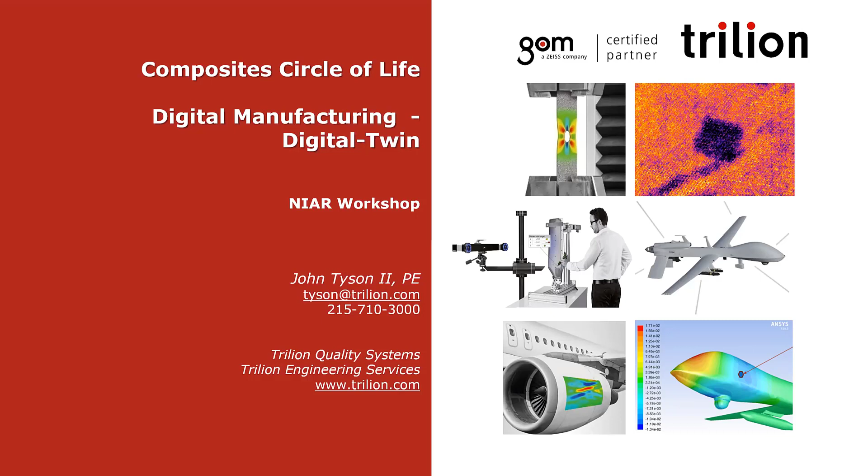So we're going to be talking about in situ NDE quality. This is where we're able to measure during the manufacturing process the in situ quality of components in real time, so you can be making good parts every time.

Our digital manufacturing allows us to do toolless manufacturing as well as guided assembly and bonding to drilling operations, click bond assemblies, all the different things, as well as alignment of components and checking all of this throughout the manufacturing process, as well as documenting it in the digital twin.

And then being able to do structural testing and structural health monitoring on components so that we can truly understand the response of these materials throughout their life. You saw in Waruna's presentation a broad variety of applications on real structures and how it could be really powerful in monitoring components throughout their lifetime.

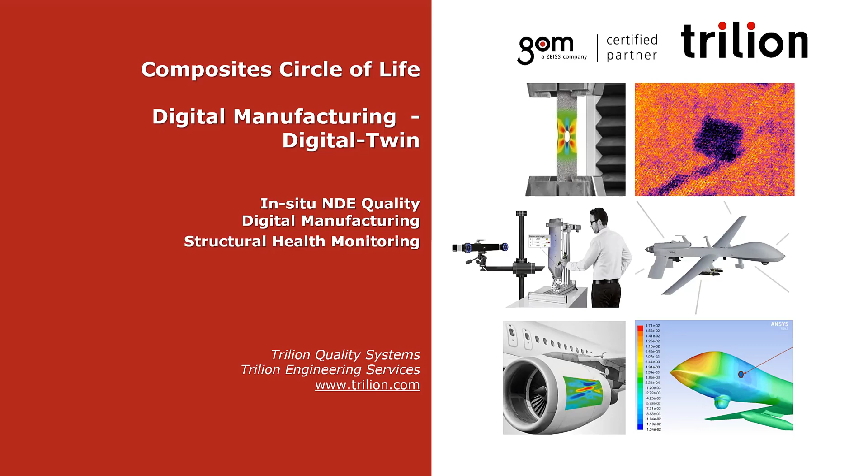So in the composite build, in situ monitoring, we can be building components even in a toolless way. The idea of being able to measure the 3D shape, deformations, the robot head location with incredible precision, as well as being able to look at the quality of the build - voids, disbonds, things like that, as well as FOD and other kinds of foreign material.

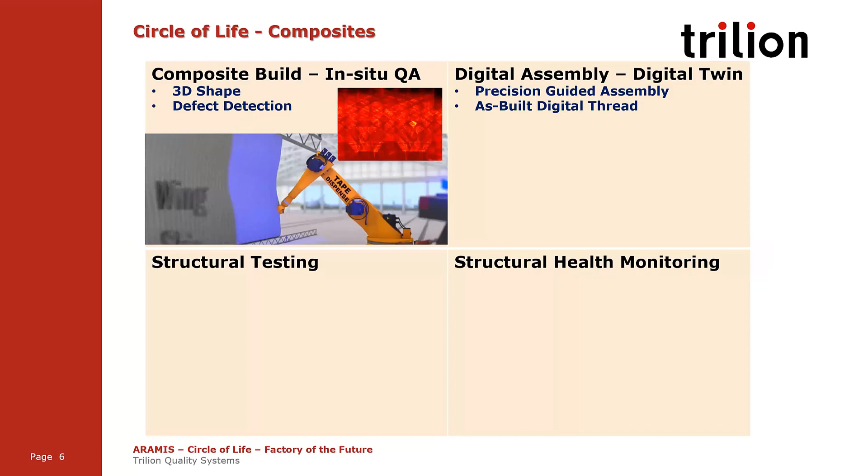The digital twin, we can be doing a digital assembly of components, and we'll give a demonstration of that with Joe Horn, our lead engineering manager, to see how this kind of assembly can be done.

Then in structural testing, the idea of being able to make measurements on an entire vehicle and really understanding the structural response of components in a detailed way, as Waruna was showing, holistically on entire assemblies and being able to see how all the parts work together.

And then in structural health monitoring, being able to monitor an entire vehicle and compare that against its finite element model, and be able to really do predictive maintenance, as well as validate the defect and its severity on the component.

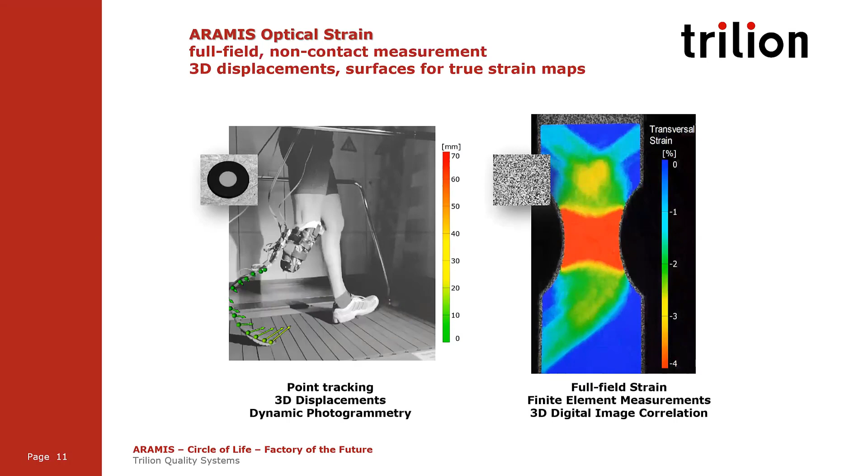So as we saw before in the beginning, there's Aramis, our stereophotogrammetry capability. The idea of being able to track target dots very simply, with a test setup time a fraction of wired sensors, or putting a pattern down and getting the full field response - the computer literally creating target dots continuously through that pattern.

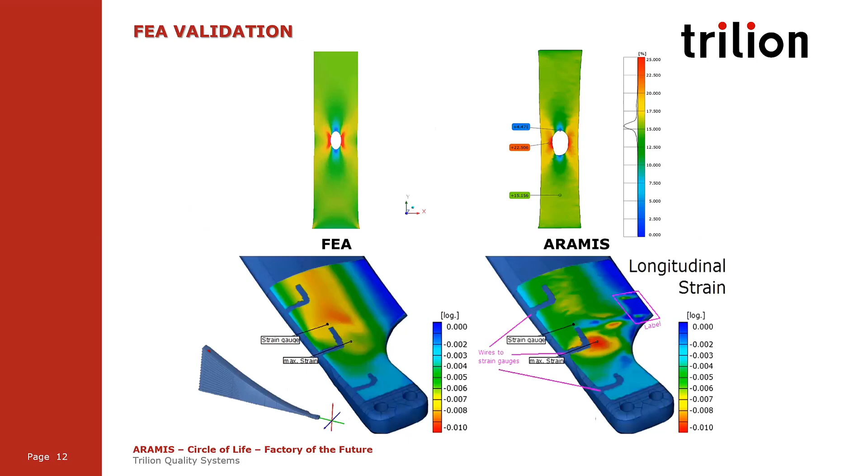And to be able to validate those results in a really clean way against comparative models and iterate those models in a good way, as Waruna was showing some of that work - including in this case the buckling of a fuselage panel, very similar to what Waruna was showing, but even large structural response of helicopters, as well as tooling and that kind of thing.

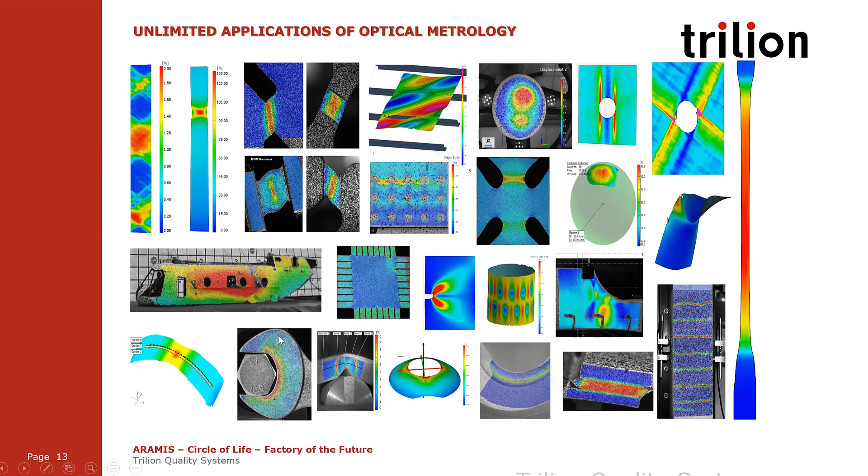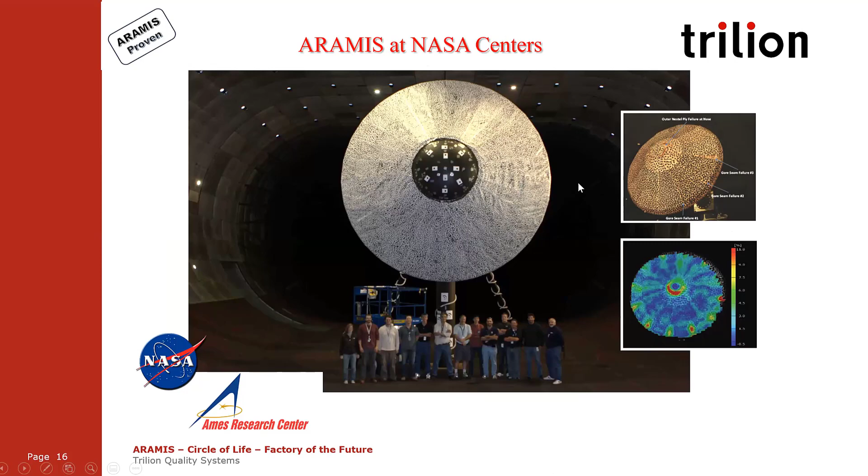So we talked about some of the applications within our NASA centers. Here's the IAD in the largest wind tunnel in the world at NASA Ames, and we had data all the way around this 25-foot diameter component during the wind tunnel measurements.

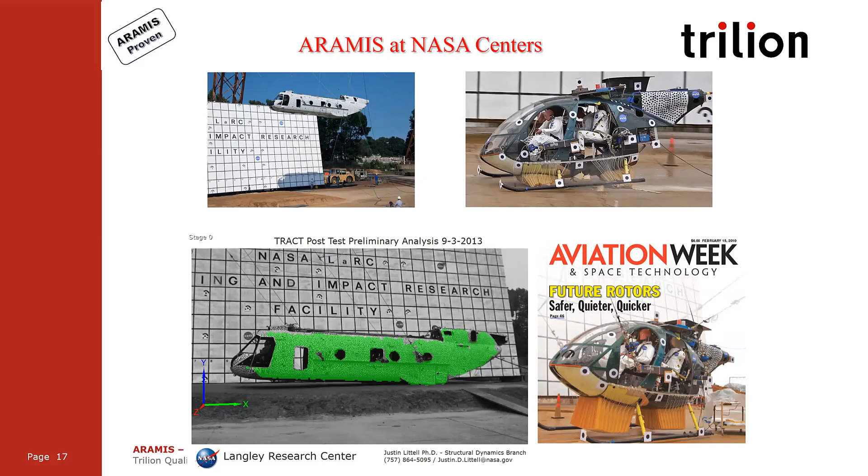At NASA Langley, they do drop tower tests regularly, and have for about 15 years with our equipment. Here's an example of an entire helicopter getting dropped and understanding the structural response of the entire vehicle.

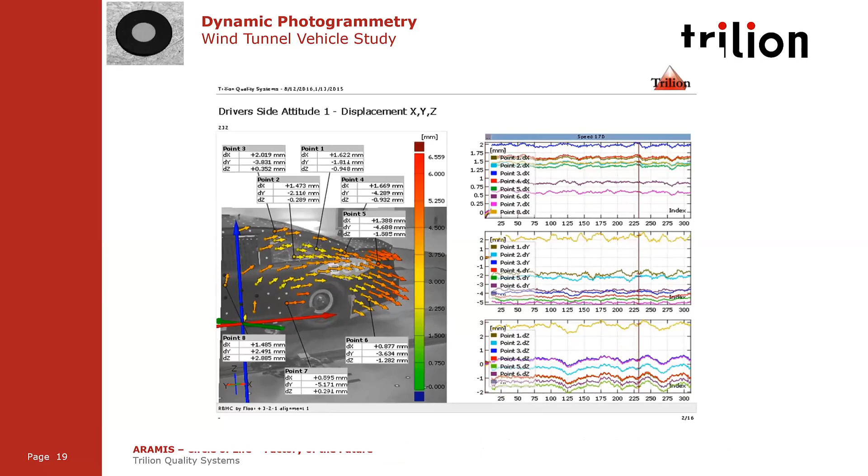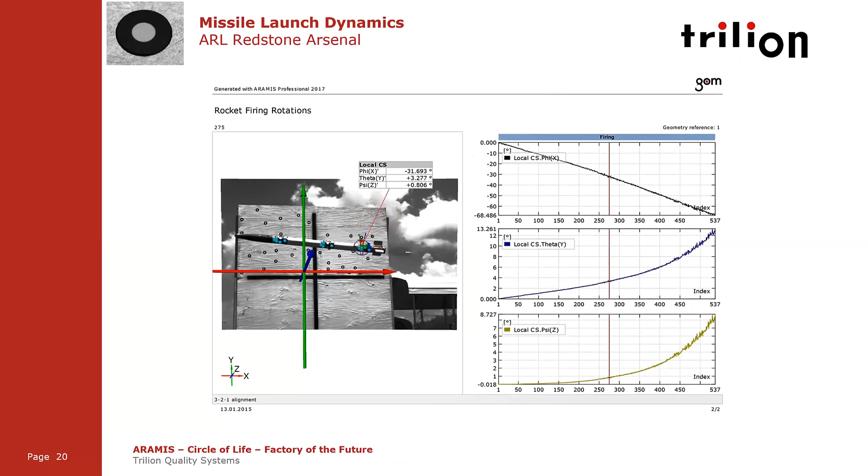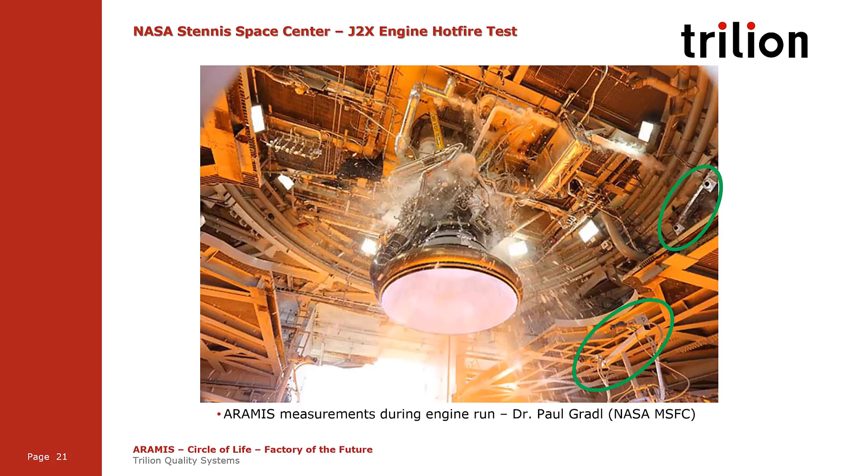That was down at NASA Marshall. And Dr. Paul Gradl testing rocket motors at Stennis Space - you can see his Aramis systems studying something that is very cold and very hot simultaneously. So that was pretty cool. And that laid out tests as we talked about before.

Let me get into digital manufacturing and the idea of being able to utilize stereo imaging systems in the manufacturing, not only quickly allowing the manufacturing steps to occur, but doing real-time quality control simultaneously.

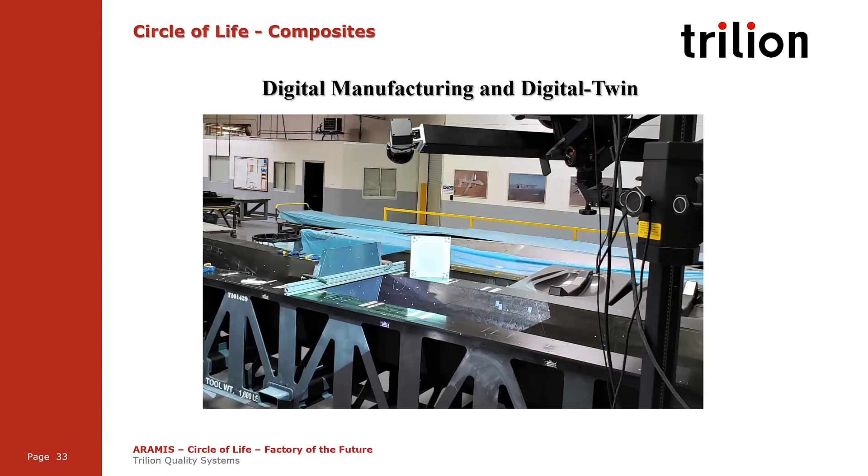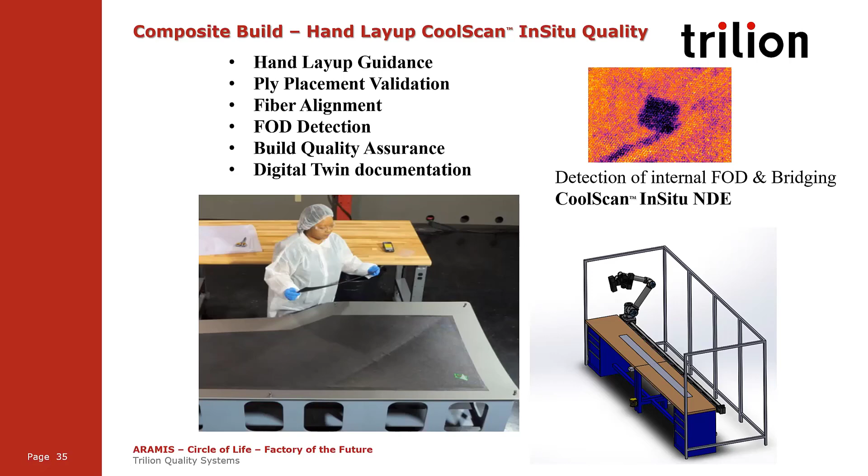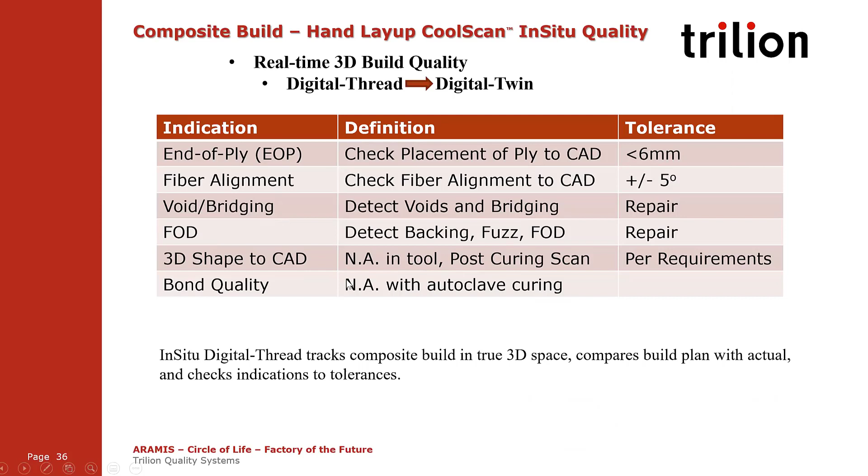And so for hand layup, we're checking for end of ply, fiber alignment, void and bridging, FOD, 3D shape to CAD, which in a tool maybe is not so important, but post-curing scans we do all the time, and bond quality, and in thermoplastics will become very powerful.

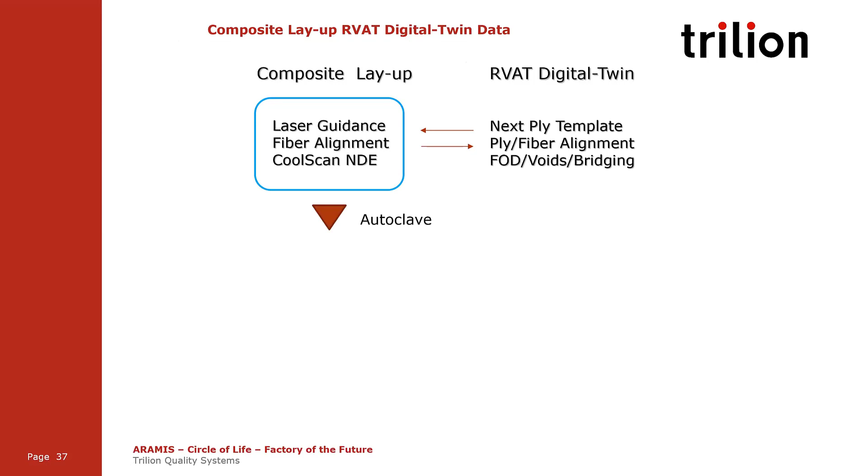So in the composite hand layup, we're going to give laser guidance, fiber alignment, and do the CoolScan NDE measurements. They're going to autoclave the component, and with the 3D scan, and then RVAT assembly, we can clean and energize robotically, do the adhesive beads, and do the QA checks. So all of this is captured in the digital twin during this process.

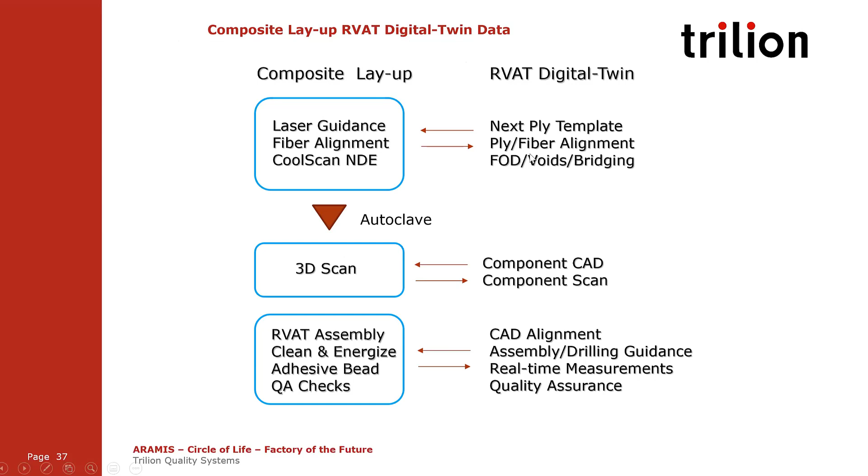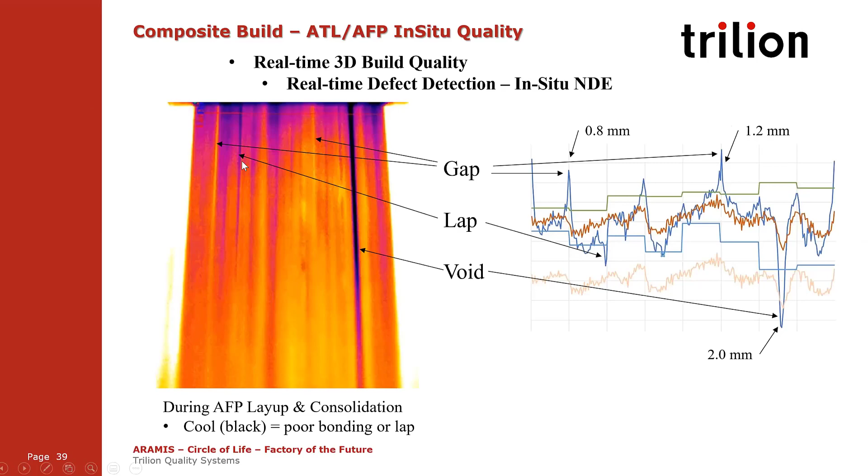And in AFP builds, we can see the real-time robotic layup, and a typical situation, here's just a single piece of tape, but you can see a void underneath. In this case, this was just a void from a previous layer buildup. But you can see gaps showing up as well as laps, all of it automatically analyzed and resulted in a complete analysis.

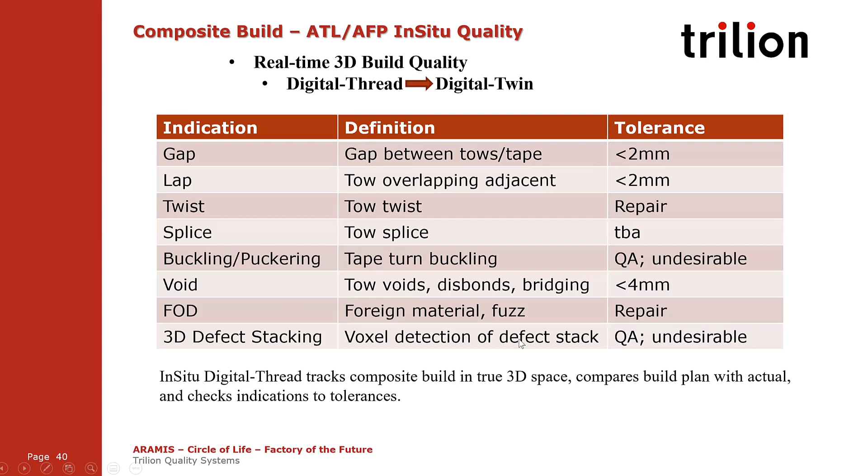And here we're looking at, again, detection of laps, gaps, twists, splice, buckling, voids, FOD, and even 3D stacking of the defects in a structure, where a defect may be acceptable by itself, but stacked up, it would be a larger defect in 3D space.

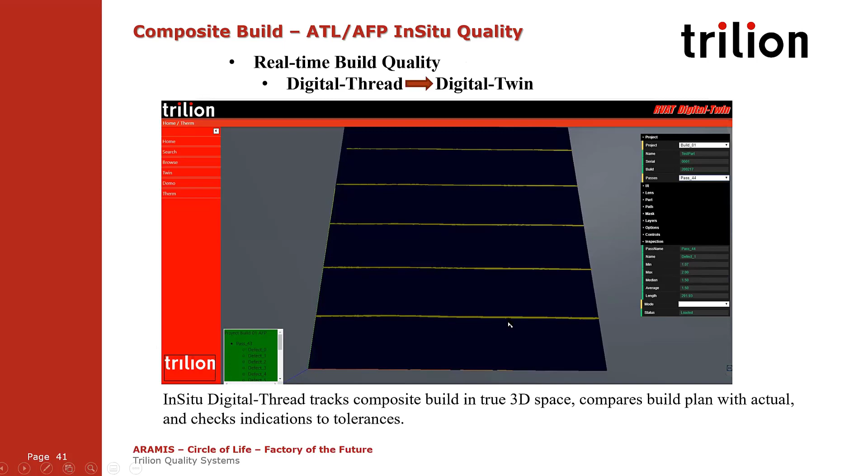And here's an example of looking at one layer in our digital twin, and we can see the results of a specific defect here and the min-max values of it, as well as looking through the entire specimen and seeing, in this case, build voids. These are all acceptable, so they're yellow, but if they were stacking on top of another, they would be called out as concerns.

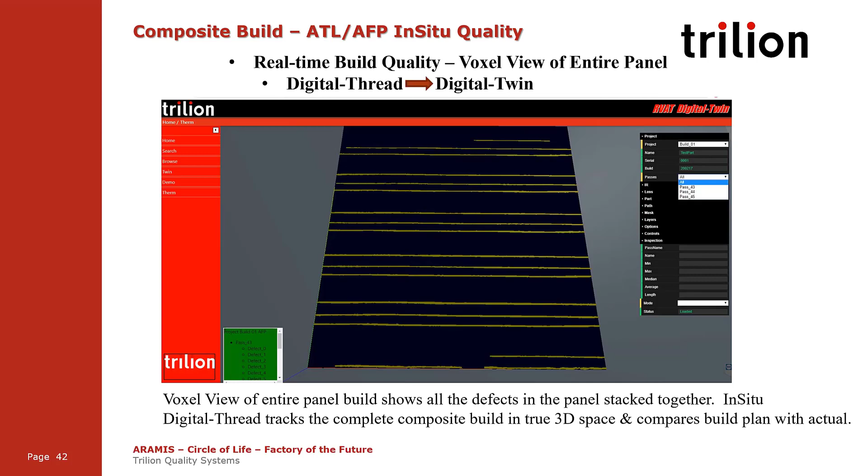So in the robotic build, we can track the robot head with incredible precision, especially when you get into larger structures and the robot is now on a gantry. Knowing the precise location of the robot head relative to the tool is difficult. We're tracking that in 6 degrees of freedom with very high accuracy.

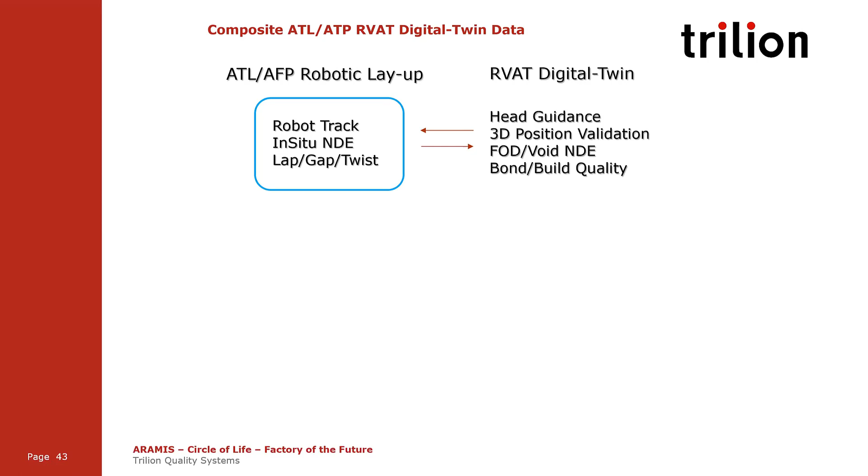Then we're doing the in situ NDE at the same time, looking for lap, gap, twist, feeding all this back into the digital twin in 3D space. So we are tracking all of this in complex 3D space. When we cure the specimen, we can then scan it, and again, RVAT assembly, clean, energize, and capturing all of this quality data in our digital twin.

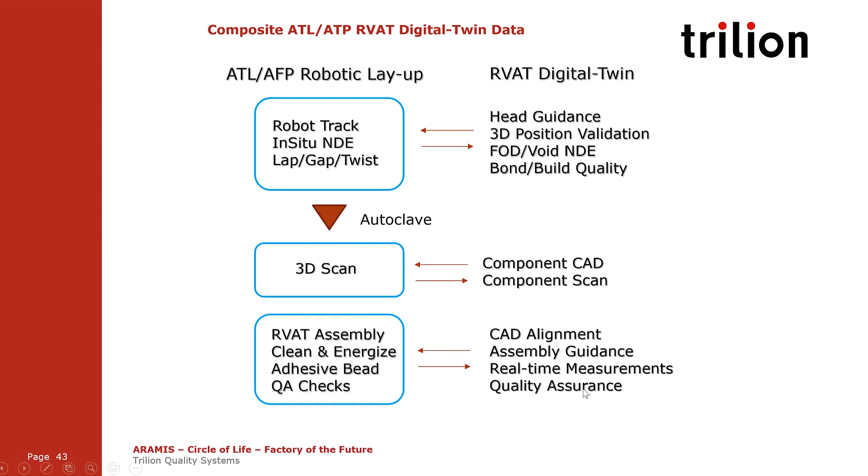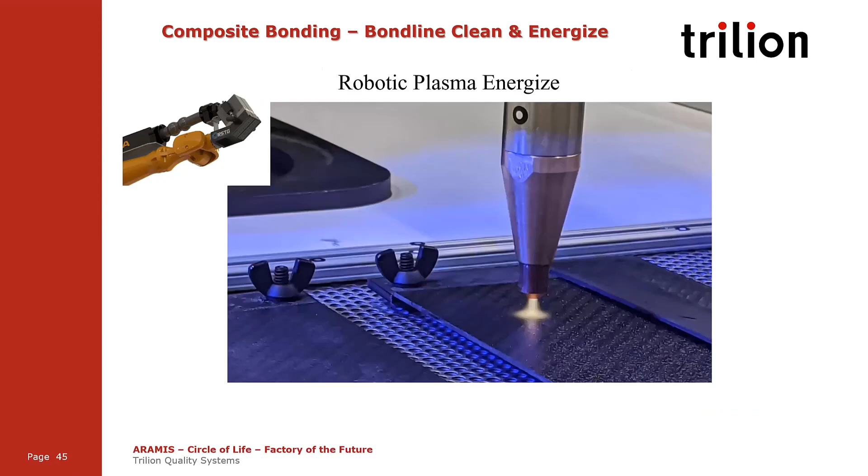When we get into the robotic cleaning, we're using a robotic carbonic 3D cleaning method, which can go and clean the surface. We can then do a plasma energize, all robotically. And when this happens, we see the shear strength of the material increasing tremendously from a properly cleaned and prepared specimen. We're also working on coupling that with laser etching as needed.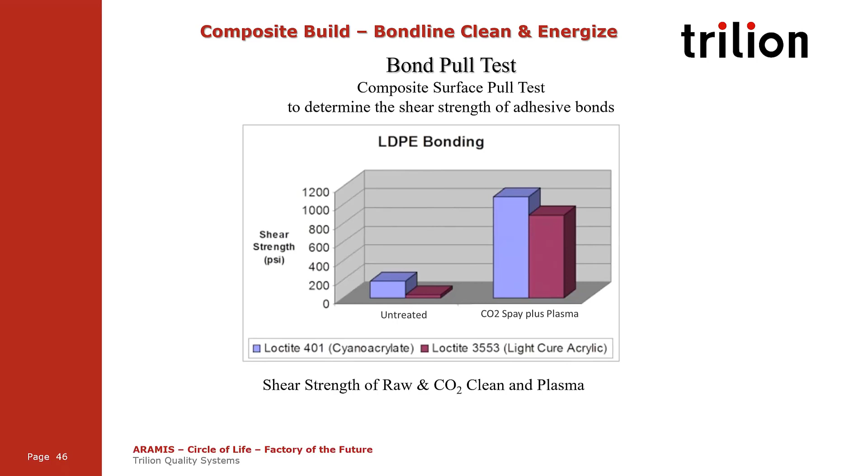And then we can put out a very precise amount of adhesive bond, and we can do what we call smart bonding. In the smart bonding, we can choose the amount of adhesive depending on what is needed to potentially fill gaps between two components or be able to measure out exactly the amount of interface area that's going to be, so we get minimized squeeze out, even internal to the structure. And then with our scans, we can measure the bond line thickness of every component.

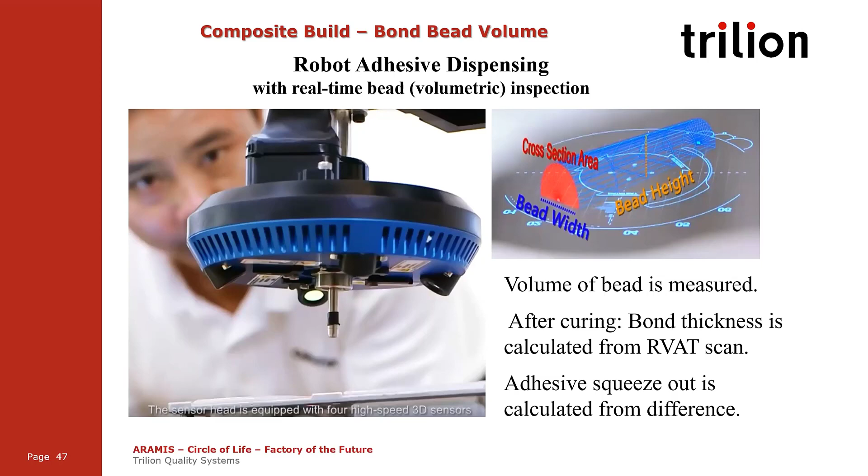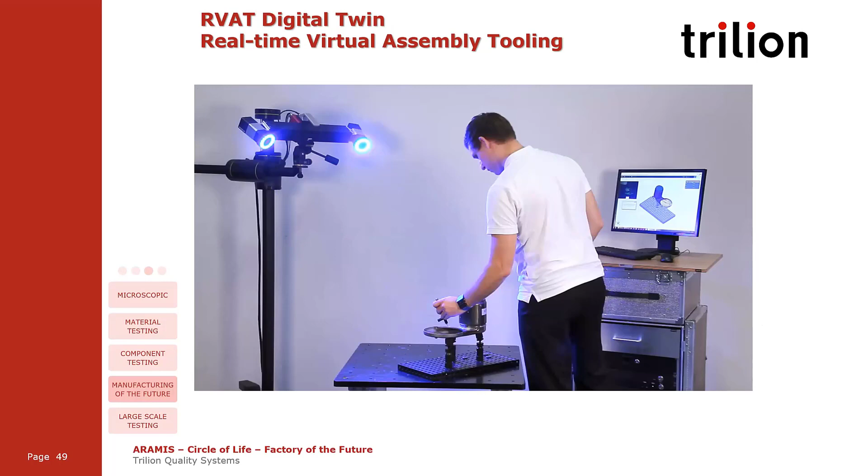Then when we get into digital assembly, we're again just scanning the component. And we're going to have a little demonstration of this in a bit. But we're using the Aramis sensor, so we're accurate down to better than 1/1000 of an inch. We're giving real guidance directly to CAD. So you're building to CAD rather than to a generic tool. And we've scanned the real part, so we're placing the real part rather than placing an ideal part.

This is MRL9, so used throughout industry. We provide complete operator guidance. So you're getting precision guidance during the measurement, making it faster and easy to use. But in applications, one of our big implementers early on was General Atomics. And they found that using RVAT, we were 60% faster than even using hard tooling.

And quality control comes in automatically. You're using the same tool after curing to check the quality, and all of this is captured into the digital twin. So you're really doing this faster and more effectively than traditional methods.

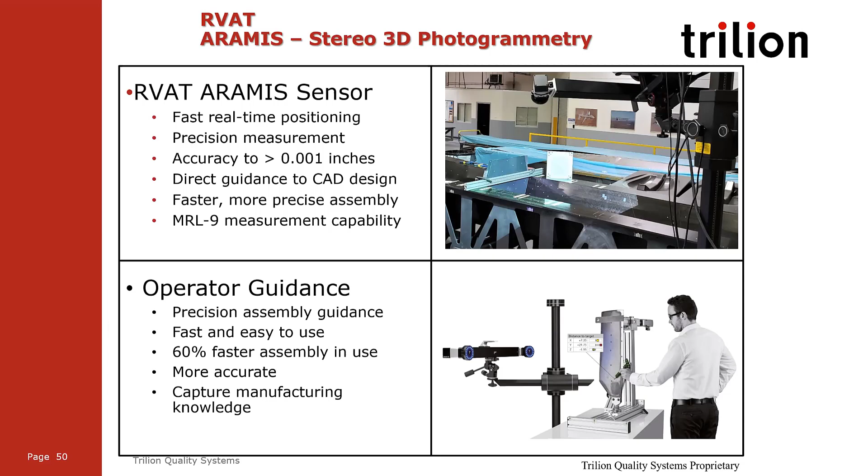So we're using a dynamic reference, and even if the component is flexing, we're still tracking it to its CAD. The CAD can even be moving in three-dimensional space as we're positioning it. So it works on any complex 3D structure, and we're measuring in true 6 degrees of freedom.

We're watching how everything moves in a really precise way and capturing each of those build steps in the digital twin, with the critical measurement points that are defined for each component. We're capturing the as-built along with the scan and the CAD. So all of this is in the digital twin capture.

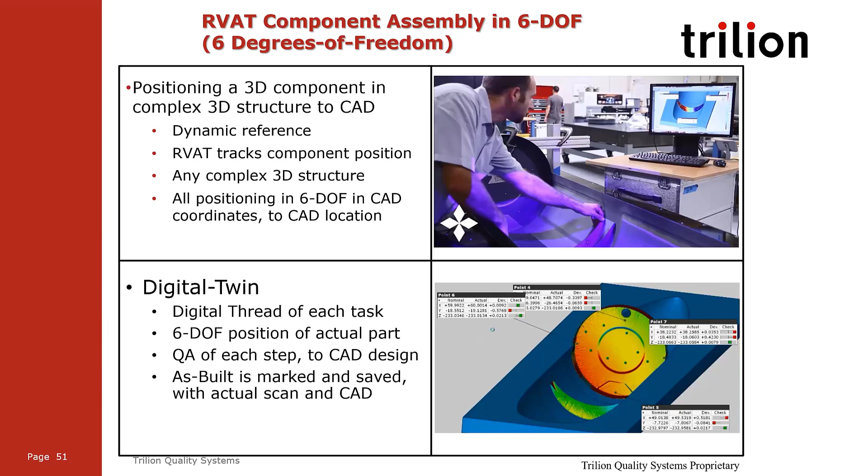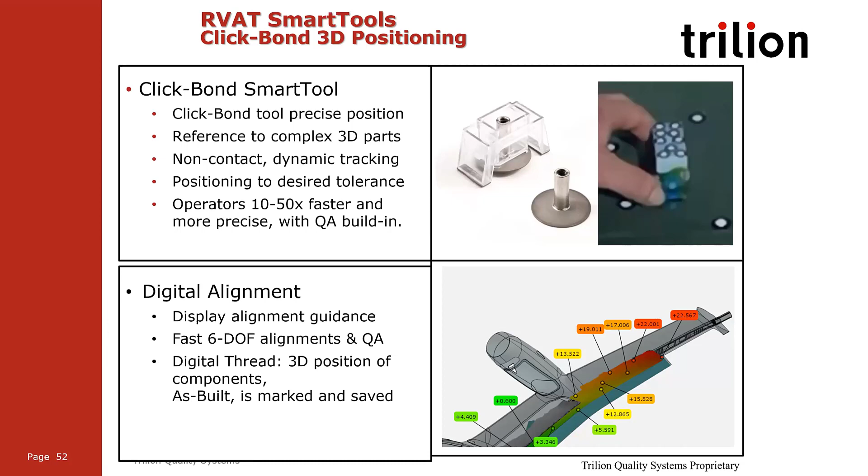Then we can do smart tools, and smart tools allow us to do a variety of different steps. As an example, smart tool for drilling, for click-bond alignment, or even custom tools for doing alignments of components. You can turn any tool into a smart tool and track it, document it, and record it in the digital twin. When you get into drilling operations, this becomes really powerful.

Here we can use our smart drill guide. This allows us to do 3D tracking with very high accuracy. And compared to traditional methods, it's 10 times faster.

Literally you can track this into position and drill your starting holes, as well as change the guides out for different drill sizes. So you can do your pilot hole, your larger hole, and the reaming hole. It's hugely faster, and you're documenting exactly for quality QA, as well as that digital thread, capturing it all in the digital twin for full analysis.

You can also do blind drilling. In this specific case, which we'll be demonstrating today, you're taking a composite panel where the system knows there's a hole in the structure down below, and you can do a blind hole drill right into that structure because the system knows where all the components are.

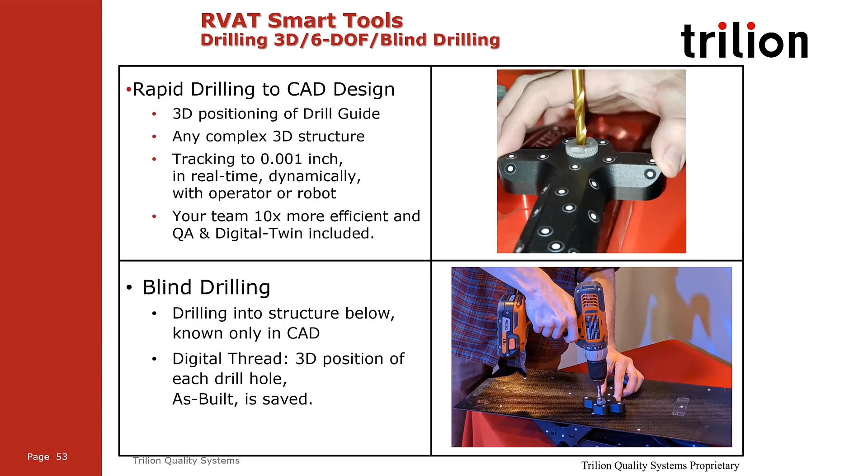This makes your team, using traditional methods, way faster and more effective than you currently are. You can even do checks to see what the gaps are for a smart adhesive bond, or feed back to engineering and say, hey, we've got a little problem here. The field people will have really powerful information to feed back to assemblies.

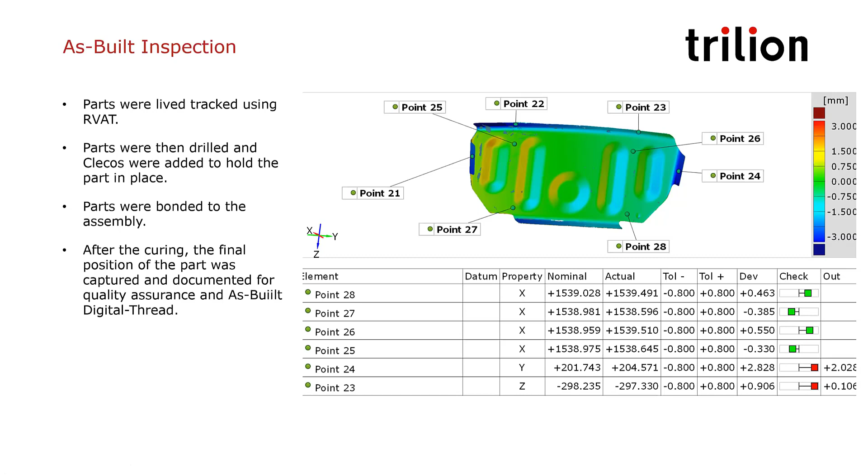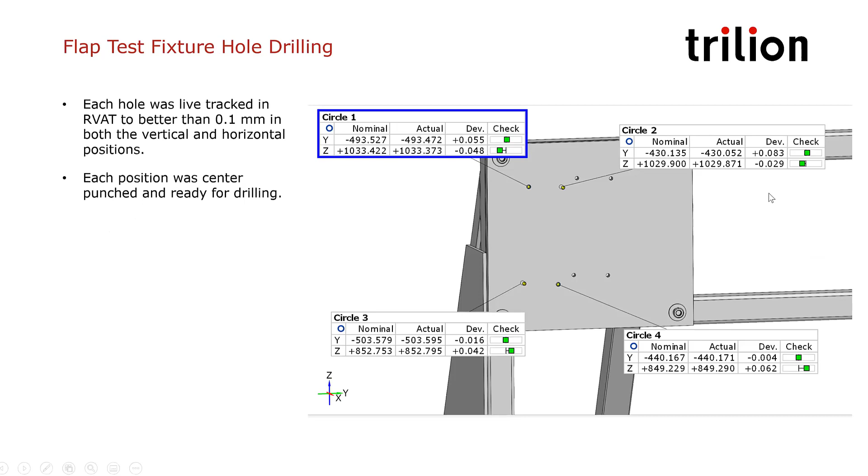And looking at all the critical checkpoints, see if they're all in alignment or not, and be able to check - this is the kind of quality checks you get, as well as feeding it into QA management, automatically getting reports, and being able to buy off on specific issues automatically and rapidly, effectively in real time. There's also an alignment tool to do a drilling guide for specific applications, and how these were put into position and checked to make sure they're all in alignment as per the requirement with the QA checks.

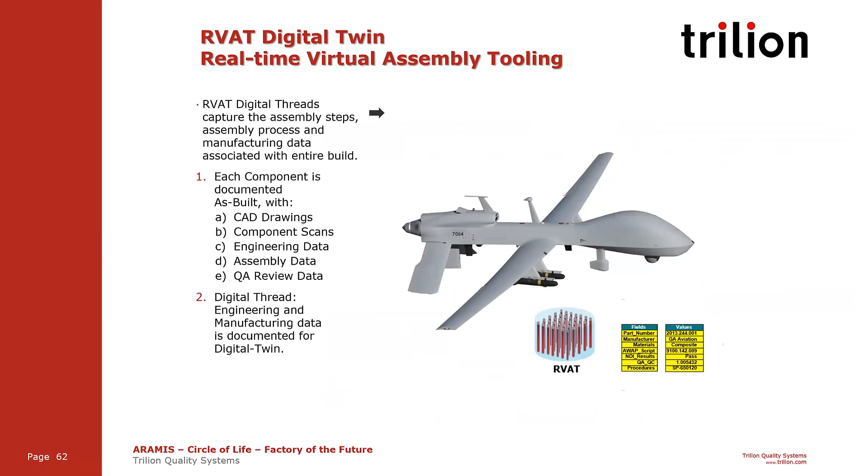We're applying this digital twin concept to understand the CAD drawings, component scans, engineering data, assembly data, and the QA review data, all put together, capturing all these digital threads into our digital twin document. So then you can graphically look at an entire vehicle and dive into, say, the wing.

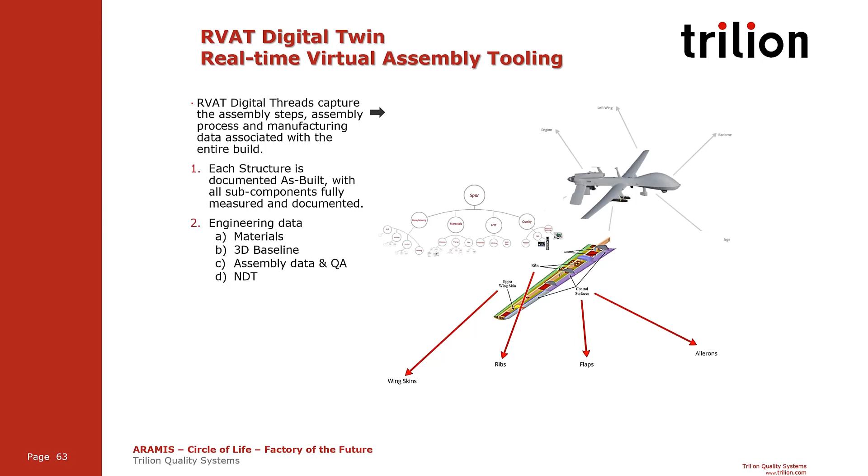You can see how the components were built, and the entire tree of information associated with every component in that assembly, from the materials, 3D baseline, assembly data, and then NDT, capturing all of this information in the digital twin.

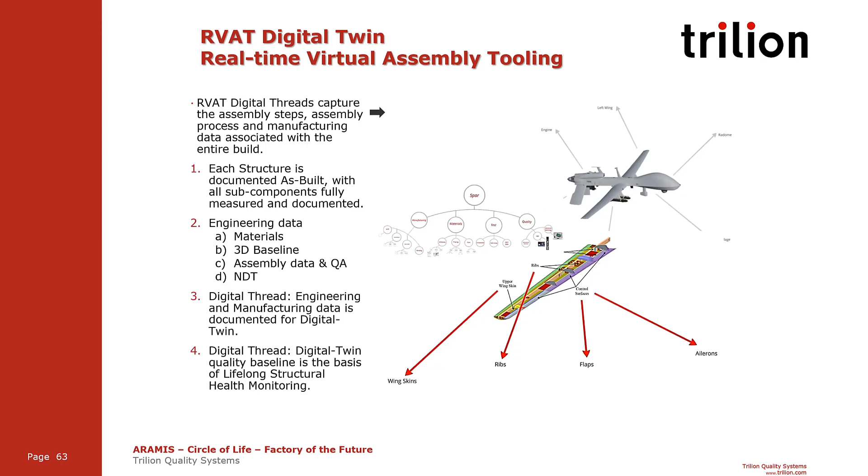But this information, especially the strain measurements, displacement measurements, and alignments, can also be used for long-term structural health monitoring. You have this all in the database, so now you can be monitoring structures through structural test, as well as through final assembly and into the vehicle.

Our digital twin server utilizes the RVAT data coming in, in-situ measurements coming in, structural health monitoring coming in, as well as the QR codes, which automatically and optically define the component serial number, and links all that data together. Then we can bring in the engineering data and your production data all into the general server, and with the agents bringing all this together into one set of data, we're able to do the analytics on this, which then provides the true data to the RVAT digital twin.

The web server can then send out a nice solid GUI and reports, but the RVAT digital twin server can then generate reports to your customers, your service team, FAA as needed and as appropriate.

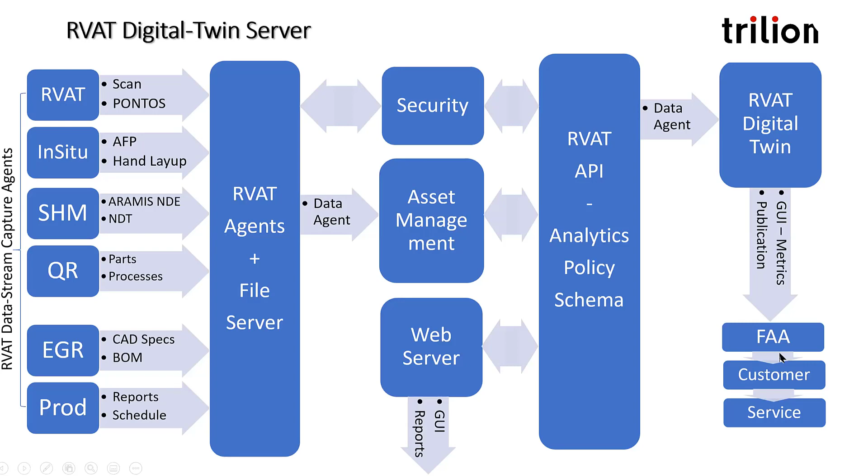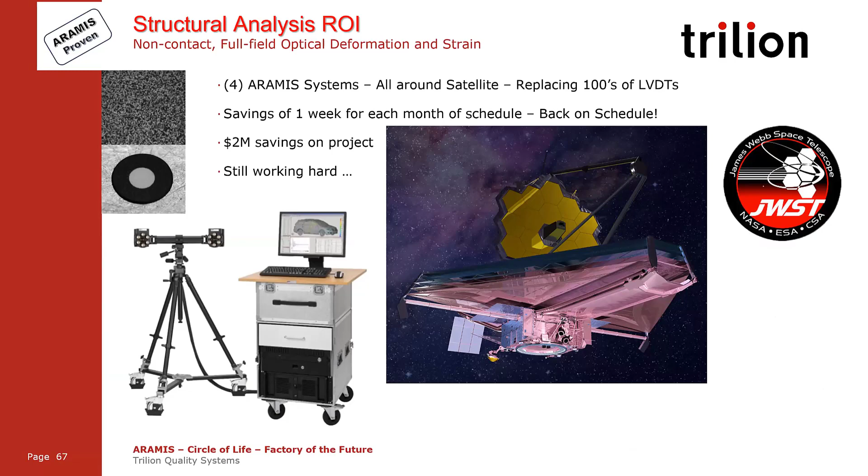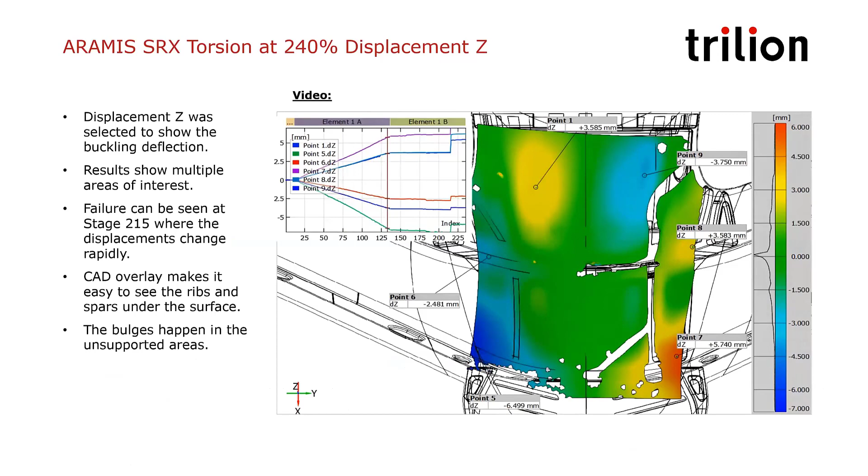So getting into structural testing, we talked about the structural testing on the James Webb Space Telescope. Literally a 3-month program, completely paid for the equipment 5 or 6 years ago, and it's still working day in and day out for free. Structural testing at Boeing, one of our very best customers, so that's all really good. Here's just some example strain measurement on a component, looking at displacements during structural test.

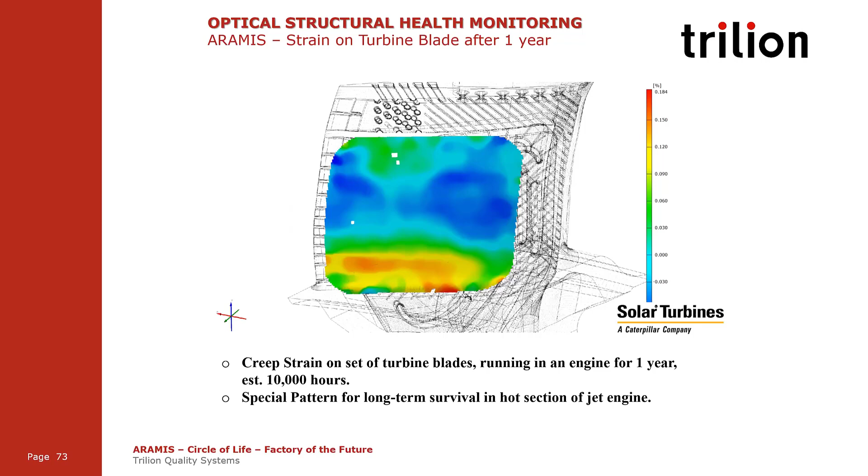Getting into structural health monitoring, one of the early things we did more than 10 years ago was we patterned a jet engine turbine blade set, and those blades went into a hot section of a jet engine. Normally we use paint to do patterning, but in this case we sputtered on a ceramic coating. The ceramic coating survived for a year in the hot section of a jet engine, and we were able to get this data, which shows the creep strain on the blade. This data had never been gotten before. It invalidated one of their models, validated another model, and is now a traditional method. Every new engine, they do the same test. This gives you an example of being able to monitor structures over a long time and understand creep events and other kinds of results.

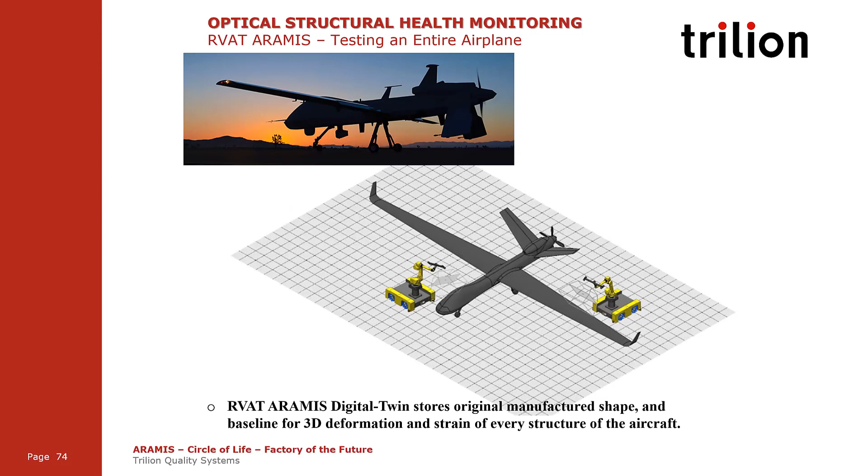One of the things we're working on right now is developing the method to be able to do this on entire vehicles or on large structural components like wings and box beams, that kind of thing. With our equipment, we found that we can detect even barely visible damage in composite structures and locate it with great precision anywhere on the aircraft with a rapid inspection.

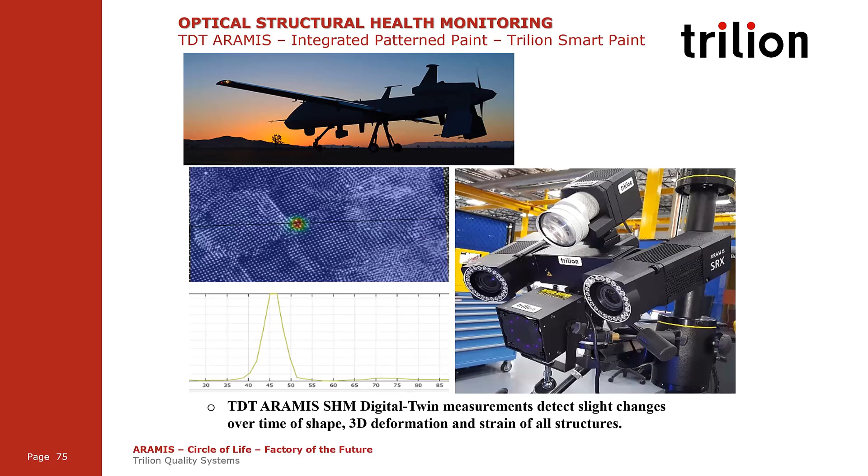We can then couple with our thermography to check the composite and make sure of the extent of any damage. With barely visible damage work we did at General Atomics, we found there was no damage at the lowest level of barely visible damage that they provided us. The Aramis still picked it up as a little dent, but there was no delamination by the thermography. Increasing the load, we created a larger defect, and then we started getting delamination. This gives you a sense of how that could work. So Aramis is the first line of measurement, and we couple it with the thermography to quickly check the extent of damage as needed.

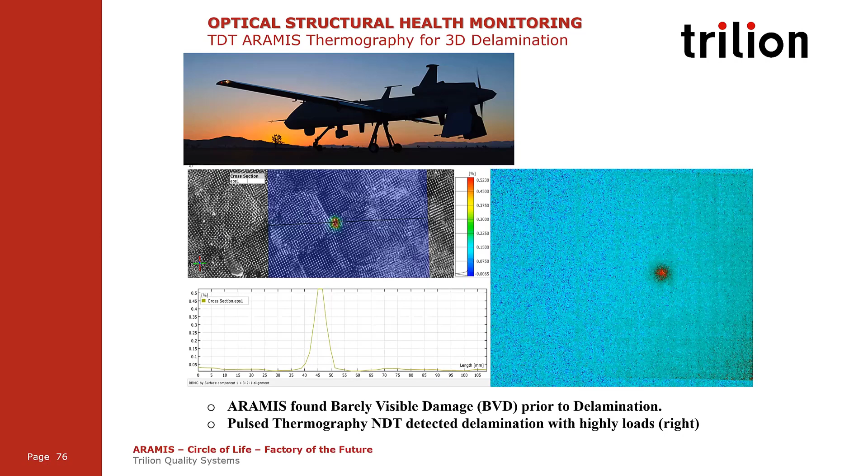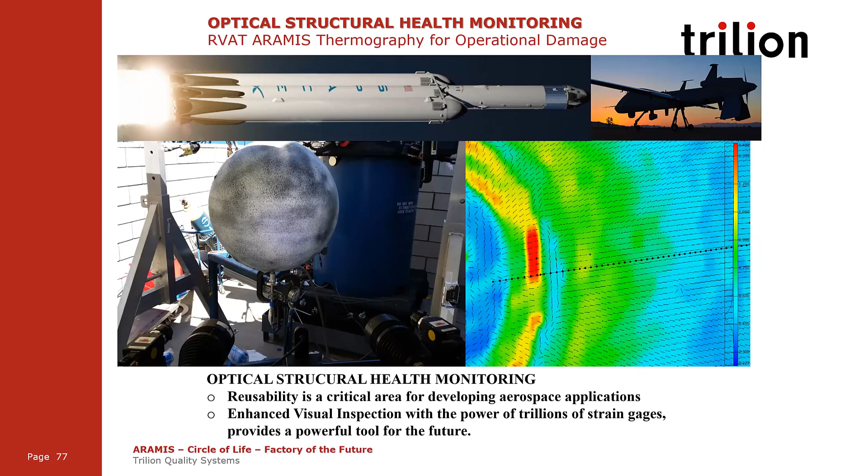When you get into structural health monitoring of more advanced vehicles, there's a need for full field optical measurement and optical structural health monitoring. It's the same thing as doing visual inspection, but really enhanced visual inspection. It has the power of literally trillions of strain gauges across the structure, and it's a really powerful tool now and in the future.

We talked about some of the applications. Typically, with GM on their stamping operations, we're saving them $100 million a year with a $2 million investment. Over and over again, we hear it's a 32-day return on investment. These sound all really powerful, but at Boeing, the real capability is cost savings 10 times cheaper than traditional methods, and that's even assuming the entire acquisition of our equipment. The manpower savings is 50 times better, so instead of 2 weeks preparing to run a test, you can be preparing in a couple hours at most.

And 100 times more data allows you to see the problems in your structure, whereas traditional methods are only looking where you think you have a problem. So you can get insight into the overall response of the structure.

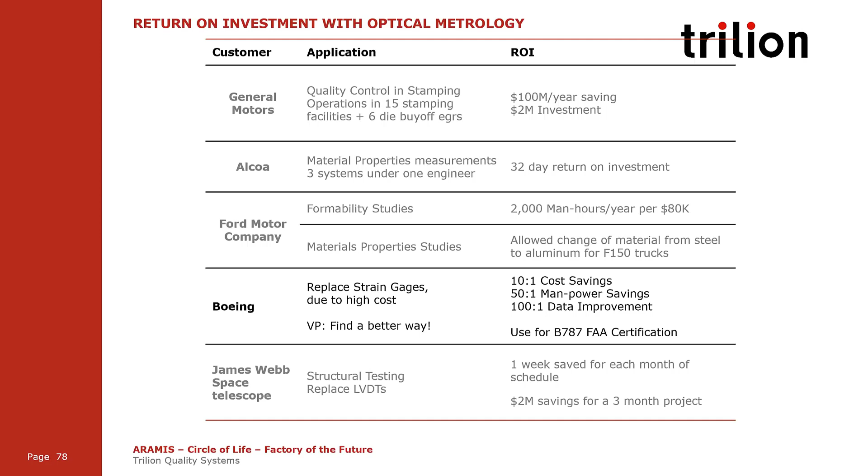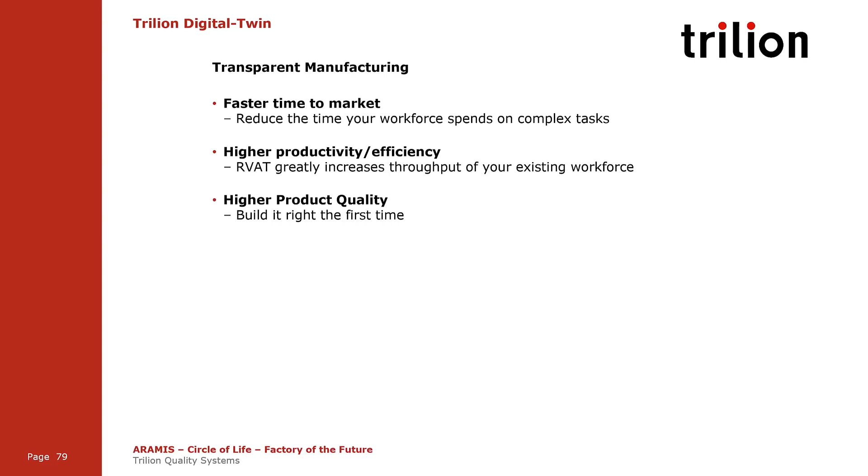This transparent manufacturing capability allows us to go faster to market with higher productivity and efficiency, being able to be literally in many cases 10 times faster than traditional methods, especially on complex 3D components, and produce a higher quality product. That's the critical component of all of this, being able to make things less expensively and more effectively. If we can get rid of some of the tooling in lesser volume applications, many times tooling is 40% of the cost of an aircraft program.

And then be able to have complete FAA certification by showing them every step you've captured and every piece of information, showing the quality and that you're following your own procedures. And then be able to do structural health monitoring on these vehicles for the life of them, enabling life extension and preventive maintenance of critical components.